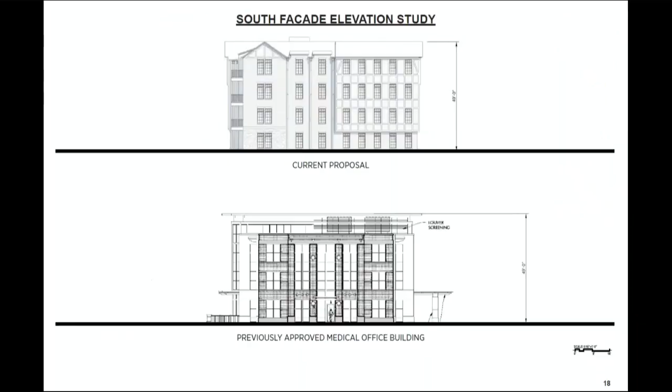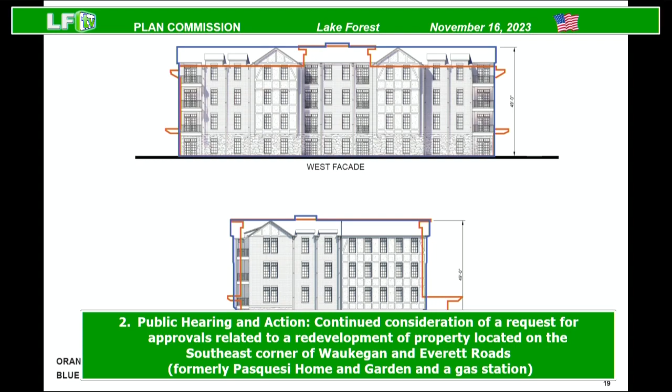Thank you. What I'm going to do is get us to, as I said, there were a number of suggestions that you had, and so we went back and made a number of modifications in response to those concerns and suggestions. There were three basic points that came from the meeting: the apartment building is too tall, the site is circuitous and there's not enough parking, and the site is too tight. So first, I'd like to address that the building is too tall.

You can see by this image here, the orange overlay, the line at the top, is the configuration of the medical office building that was approved. And the peak of it was 49 feet.

The peak of this is 49 feet. The actual roof of this building is slightly higher than the actual roof of the medical office building. This is 4 floors versus the 3-floor medical office building, and for obvious reasons the structure of the medical office building and the mechanical distribution system require more floor-to-floor height. The apartment building doesn't require the same height.

So one of the important changes that we made in response to your comments was we reduced the requested height from 54 feet to 49 feet, so we match our previously approved building.

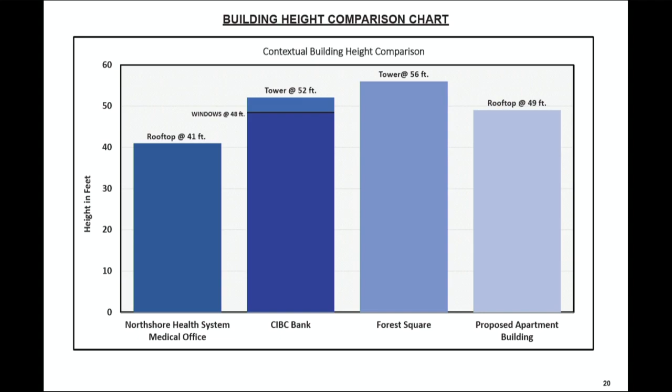This shows some relationships to some of the buildings in the market. We are the one on the right. The others are not rooftops; they're tower elements or lighted elements. We were at 54 feet. We're now at 49 feet, as I mentioned, matching the height of the medical office building.

The other item I'd like to address is the site is too tight, and Nick Patera from Teska will deal with that in more detail. We'll show you the specific changes that we made, but let me go to—

Different. I'll leave it at this.

Yeah, this has some of the data. It's a little bit hard to read, but basically we exceed the open space requirements per code, we exceed the green space requirements per code, and we have far less lot coverage than is required by the code.

Nick will deal with the site plan modifications, and Luay Aboona from KLOA will also deal with some of those issues as well. We adjusted a number of the turning radius so we could provide for better turning for the fire trucks and make the site easier to navigate.

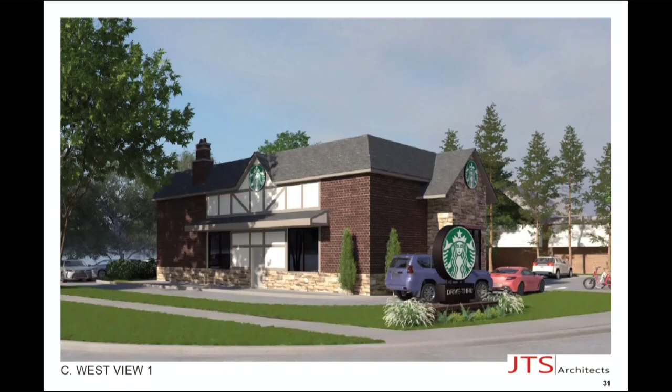That has worked for the past 30 years. We're expanding that driveway from 18 feet to 20 feet. We're not developing this in a cornfield. We have got some constraints on the site, and so we believe that this works, and so we would ask for that consideration as we move forward.

A couple of other comments - we comply with almost all of the comprehensive plan goals. We'd like you to consider that. We comply with most of the zoning regulations, certainly the use, not the height, but the use and many of the other zoning elements.

This is a challenging site. What we would like you to consider is that we'd like to develop the site in 2024 instead of 2034. The recommendation of the staff to deny this and that it wasn't quite ready for a vote - we would respectfully ask for a vote this evening.

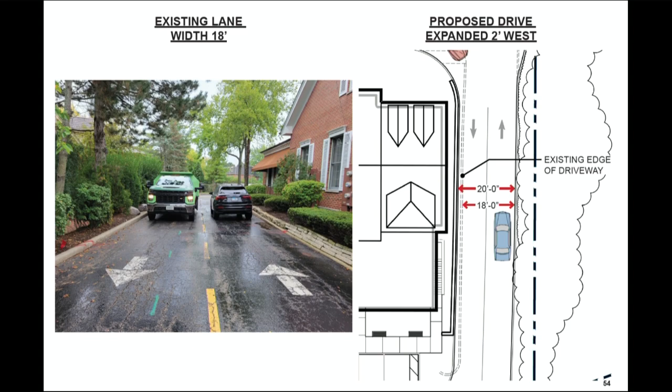And we're prepared to move on to the city council, but we'd like you to think about what we comply with and how we could actually move forward with this project next year, and not be so rigid that we have perfection being the enemy of a really good site plan. You've seen a lot of different plans over the past years here, and we have a lot of confidence in our plan and our team.

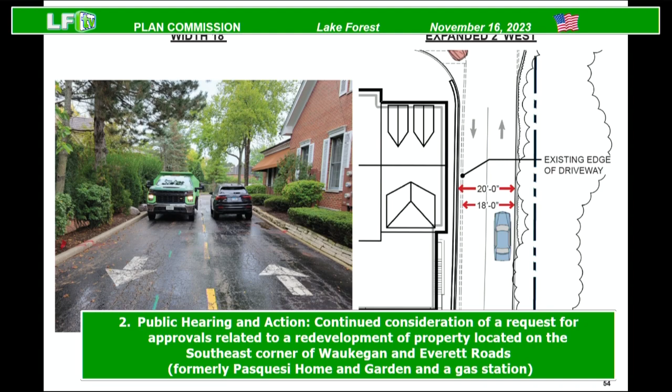So I'd like Nick Patera to address a number of the site plan changes that we've made. Thanks. Here's a timer, by the way.

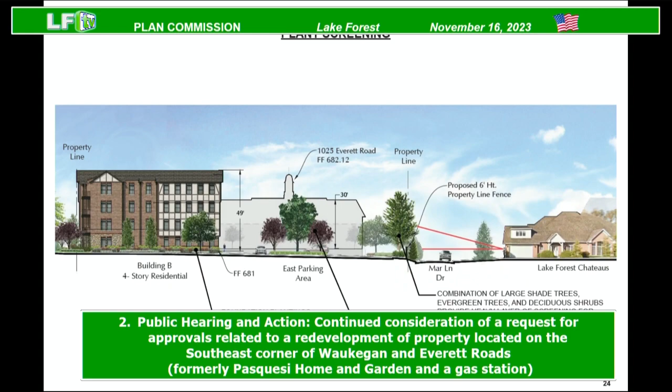or short-term pickup and drop off for residents of the apartment building. Finally, on the north side of the existing Everett Road building, we removed one of the 3 parking spaces that was facing west. There was a concern from the city engineer's comment that it would be a difficult turning movement. We eliminated that 3rd parking space facing toward the coffee shop, but kept the ones on the north side of the residential. This is page 13, if you're paging through and looking for what we're doing here.

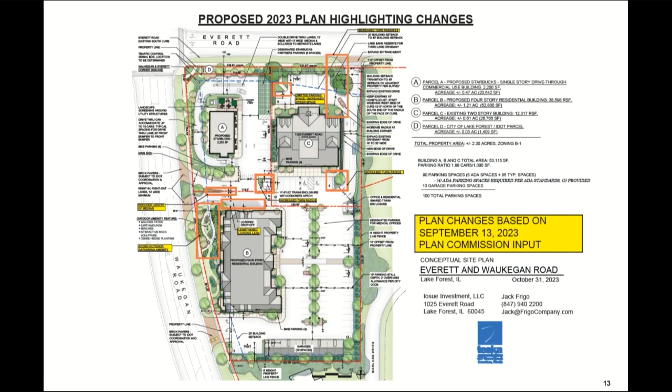We can do that, but there's an existing honey locust tree at that location. We'd love to say that this is a land bank reserve for the 3rd lane. If we cut down the honey locust tree, we can do 3 lanes. But right now, we're still showing it as a 2-lane entrance, and it's something we can address as the development starts to progress. So those were the primary changes.

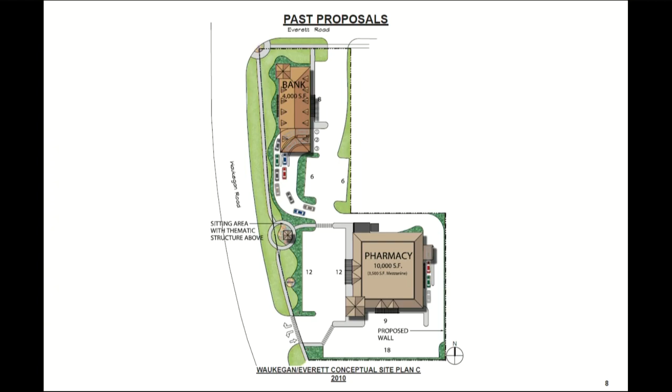One of the questions had to do with being able to have interconnected, let's see, open space. Oh, I'm going backwards, my mistake. Umpteen plans before this one.

One of the things we also added that I didn't mention before was a gathering space. This is the northwest corner of the residential building, a seating area, a place for casual gathering, a place where you could say, I'm walking up the sidewalk on Everett and I need to get away from traffic, so it would have landscape benches and some plantings.

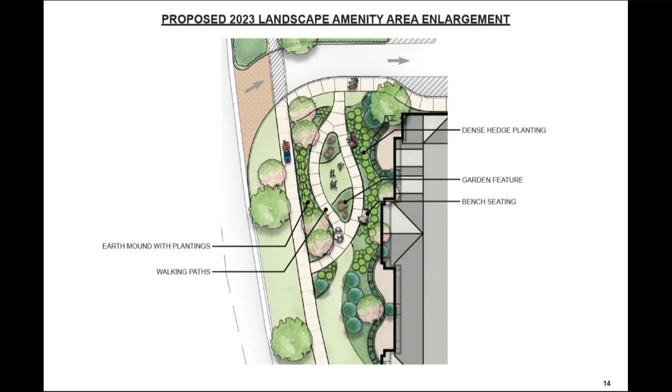Carrie from Mariani is here with us this evening. She could explain later on a little bit more about the landscape plantings, but this was an addition that was asked for that we have included as one of the many public gathering areas.

And then finally, I'm going the wrong way again. Page 23, I'm looking for. There. This is showing green space around the perimeter.

One of the things you need to kind of look at and think about with this site plan is where are the buildings. The buildings are actually facing the right-of-way. This is a site planning question, but the buildings are presenting themselves to the streetscape, and what you're not seeing

excuse me, is what you see when you go further north into Settlers Square with a large sea of parking. The parking's actually tucked behind. It's landscaped on the south side against the residential. On the east side, it's landscaped. So those are not just buffers, but they're heavily landscaped for the residential. But the parking lot works. It's tucked in. It's not your first impression of downtown Settlers Square.

And then it's connected so that the red dots are showing how I could traverse as a pedestrian accessible route to go to the residential, to go to the coffee shop, to go to the medical, or to walk up to Sunset or the train station. So those are some of the elements that we've brought into both the private and public open space areas that show the connectivity and the increase over 27% average, where it's only required to have 15% open space. This is 27% with all the green that you're seeing with sidewalks and green space.

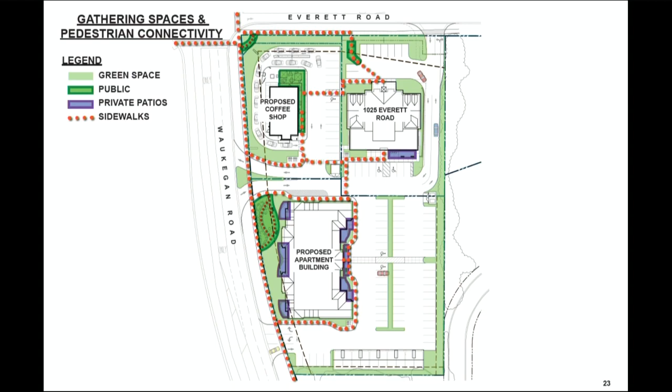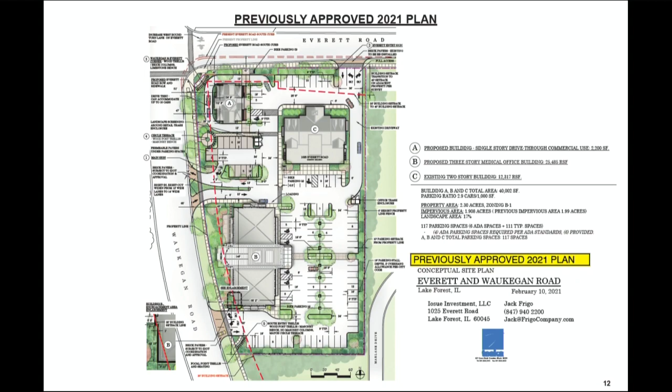Jack has already shown the building shape. I want to keep to our time frame and introduce Luay Aboona from KLOA to talk about traffic and circulation, and I'll get you back to the site plan. This is it.

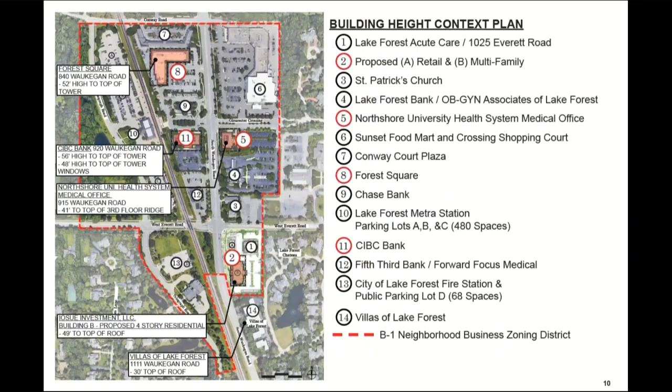I wanted to make that clarification as we talk about 3 and 4 stories, but we have completely different uses. So we'd put to you, even when we look at our building — I just wanted to show this view. When you look at this building, you don't really even see the mansards as you would walk by it. The edge of the roof you see here is comparable to the edge of the roof height of the previous medical office building approved several years ago.

Thanks, Joe. Just one or two other comments.

Traffic is an important element in any plan and its impact on the neighborhood. The comparison that KLOA had done comparing the medical office building to the 32-unit apartment building shows the apartment building would generate about 860 fewer vehicle trips per day. I know in some of the correspondence Kathy had received, people commented on a 4-story building and the traffic that would generate. The traffic is significantly less with the 32-unit apartment building than a medical office building, so I want to make sure that is recognized as part of the analysis.

There was a comment in the recommendation to deny approval that the site is circuitous, but what we're doing is putting 3 individual parcels together so they can actually work together, instead of having the BP station and then an improvement on what was Pasquesi Home and Garden and 1025. By creating a campus, as Louie mentioned, we went from 7 curb cuts to 3 curb cuts and organized the circulation on the site, so the intersection flows much better.

Given the site constraints and the history of this property, we think merging these properties together by cross easements for ingress, egress, as well as parking is really important. There was also a criticism that it needed to be more aesthetically pleasing, and we object to that phrase. We have a world-class architect, Joe Antunovich, for this building, and for the overall site plan, a world-class landscape architect, Mariani Landscape.

So we like this site. We like our plan. We think that the fundamentals of the plan work really well, and we hope that you'll give it consideration so we could move on this evening.

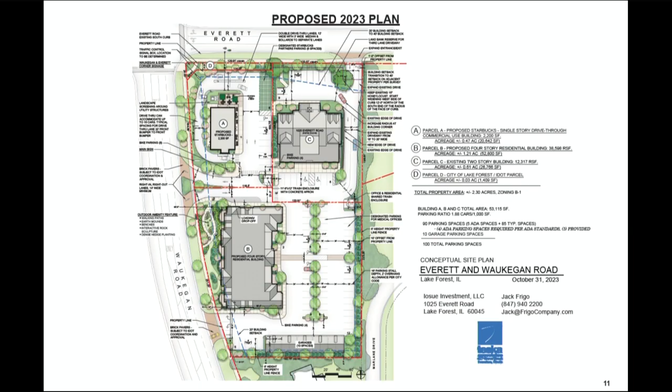I mean, you addressed some of this, but just reading the GHA engineering report to the city, I'm curious as to your take on some of the points they make here. They're pretty direct in their perspective on why they think some of these things are tight. You addressed some of it, but do you mind just taking me through that a little bit?

Well, first of all, I showed you the photograph of the east lane. So somebody is reading a manual that says it should be 24 feet, and if we had the opportunity to make it 24 feet, we would. We can't. We have a building on the west side of that lane where we can expand the lane 2 feet, so we'll do that. We can't go east because of the property line and a significant drop in grade, and there's stormwater infrastructure there, so going east isn't possible. We're very comfortable with that, and our traffic engineer, KLOA, is comfortable with that as a two-way.

With regard to their comment on the standard parking dimension, and Kathy mentioned this as well, that's one of the points I raised when I said that there's some clarification that's needed.

The way the report is written is accurate in that we don't comply with the standard parking dimension, but we do comply with the code, because the code allows for a slightly shorter parking space if it abuts landscaping. So reading it, you would say we don't comply with the code, but we actually do. Those comments from the engineer are technically accurate, but we don't think operationally they impact the use of the property.

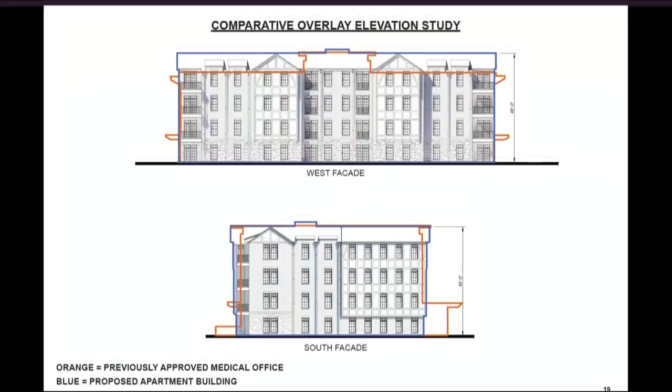Well, the roof is, as Joe Antunovich mentioned, about 2 feet difference in actual roof height. You see the gables on this, right there. So the gable on that is about the same height as that roof element that runs in the MOB, the full east-west dimension. Right, so you can see it there. Like at the bottom image, Commissioner, if you look at that, you can see how the massing of these two buildings is almost identical. The roof height of the proposed apartment building is almost identical to the roof height of the previous medical office building.

Right, but you'll concede that the zoning code allows flexibility in relation to mechanical enclosures? Sure, yeah. Whereas it does not allow flexibility in relation to roof design? No, we're asking for a variance. As Kathy mentioned, because the medical office building was approved and it wasn't without some criticism, we need a variance to make this project viable.

Kathy, the variance for the height is handled by the Building Review Board, correct? The height limitation in the commercial districts is in the zoning code, so it would be appropriate to incorporate it into the special use permit. You are correct, Commissioner Moorhead, that the Building Review Board is able to grant zoning variances for residences, but in the B districts, the 35-foot height limitation is specifically called out.

Okay, so just so I understand, Kathy, when we had the 49 feet approved for the medical office building, was that via a special use or was that a variance? And is there a distinction between them? A special use permit can incorporate and grant variances, so it is a variance, but it can be incorporated into a special use permit. So to have a 49-foot height approved, does that require a special use or is it just a variance to permit a 49-foot height? It is a variance that can be acknowledged through a special use permit. It is a variance, yes, and the variance criteria would apply.

Okay, so in that case, what is the hardship for the roof again, for the request for the variance on the roof? Well, first, we need these 32 units to make the project viable. So let me hone in on that—to make it financially viable? Yes. So it will not work under any circumstances if you don't design it like that, Commissioner Moorhead?

The economics for the developer are one thing... you're looking for what the hardship is. Our motivation in making this four stories is to have enough apartments so the project can go forward, so it will be worth investing millions of dollars.

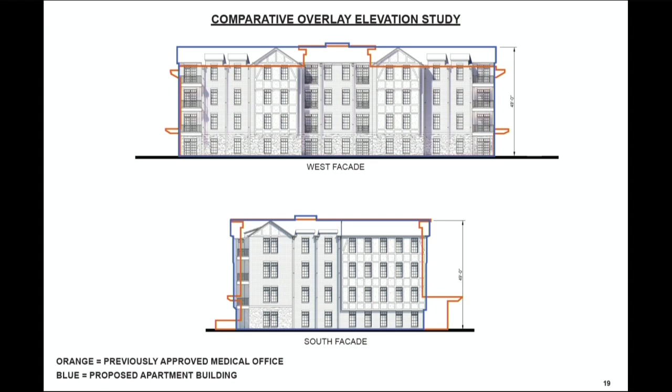Thank you. Can I ask some questions about the KLOA report? Just to jump around in the report, part of your analysis used the IDOT traffic records from July of 2021. My question is, 2021 we were still in COVID—is that an unusual year, an outlier, and should we be looking at other years with more realistic traffic conditions?

If you're referring to the IDOT data for daily traffic, that's the most recent information they have published. We have in the past tried to use pre-COVID numbers, but they specifically asked us to use the most up-to-date data. This is just a reference of what the daily traffic is on the roadway system. Our analysis is more based on actual count data we gathered at the intersection, so this is merely citing what the road is carrying. If we go back to previous studies where the data was 2019 or 2018, it was likely higher, but it's more of a reference point and not necessarily used in the analysis.